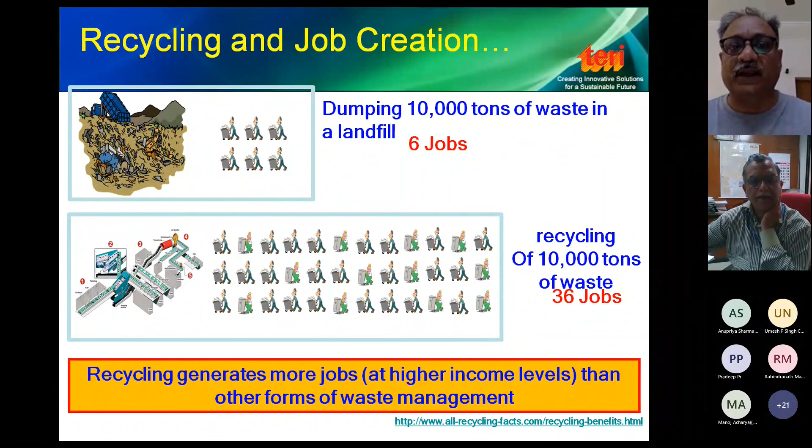Recycling is an important aspect. Studies have shown that dumping the same amount of waste creates 6 jobs, while recycling the same amount, if recyclable, creates 36 jobs. Recycling also creates additional jobs at higher income levels compared with dumping. So it's established that recycling creates quality jobs, and they're all green job creation, which we all talk about.

Just to give you some trends in Europe, for most countries, looking at packaging waste, this is data for 2020. Packaging waste recovery and recycling has been reported at 64%. There's a slight dip in recent years, and that's understandable because of COVID, pandemic, lockdown, and sudden increase in use of single-use plastic material, which increases plastic waste. Packaging waste is mostly plastic. Municipal solid waste recovery and recycling has been reported at 49%, and overall recycling on average is around 46%.

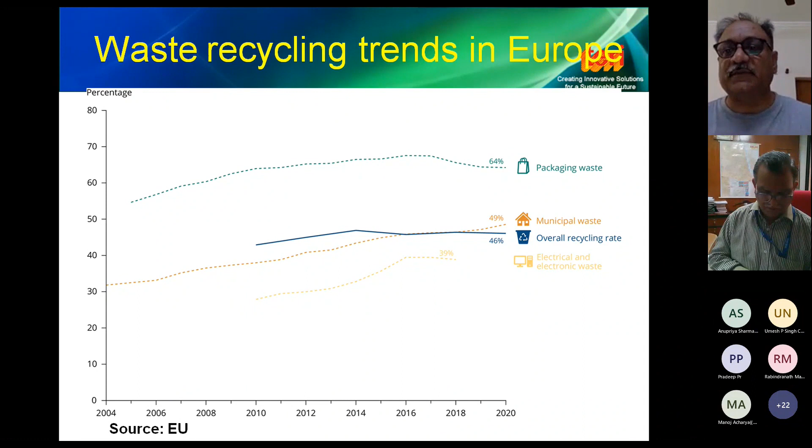So that's the kind of scenario, the kind of benchmark which we look at when we look at recycling and the level countries have to reach. If not 100%, that's sometimes not practically possible. But what are the levels which are desirable?

When you look at world's recycling industry and market, how recycling affects not only jobs but also the kind of economy and economic resources it generates, globally around 1.6 million people worldwide are active in the recycling industry. So recycling is really a global phenomenon, and together they handle around 600 million tons of recyclable waste every year.

And annual turnover in the recycling business - I'll also give you some of the major recycling companies globally - the annual turnover is around 200 billion, similar to the GDP of countries you can relate with, like Portugal, Colombia, Malaysia.

Important to note here is that whatever profit these companies make, roughly 10% of that is plowed back into developing new technologies, developing new environmental standards, and funding research and development, which further creates high-skilled jobs.

Globally, the percentage of secondary material recovered through recycling meets around 40% of the global raw material requirement. So globally, 60% comes from primary material supply, majorly from mining, and 40% comes from secondary material supply. That's an important contribution which recycling industries are making.

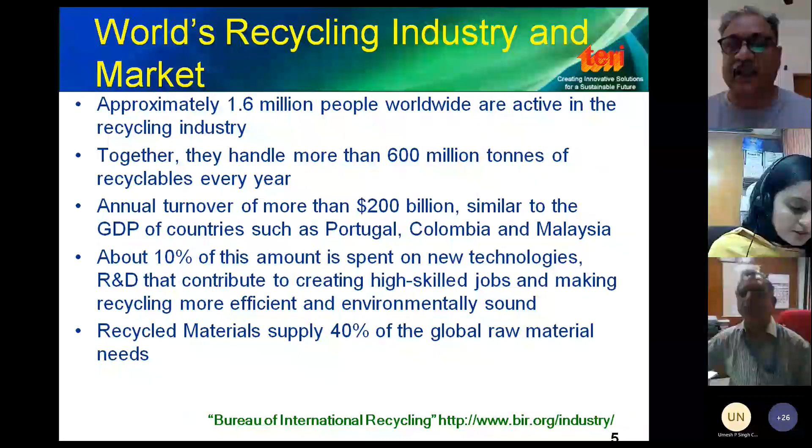So what I'll do from there - this was just to give you a flavor of why recycling is important and why one should look at recycling as an opportunity, and what's the global discourse on recycling currently. It's already established when you look at recycling, except for plastic packaging material in some cases.

It's already established that recycling of, say, metals - largely aluminium and copper - and recycling of glass, though it is more energy intensive because primary production of glass itself is more energy intensive, save around 90% of the energy compared to mining virgin resources and producing a product. Plastic is slightly lower, saving around 65% energy. It's established that recycling is not only less energy intensive than producing virgin material, but since it's less energy intensive, it also helps in meeting climate goals, because that much energy saved means that much greenhouse gas emissions are reduced.

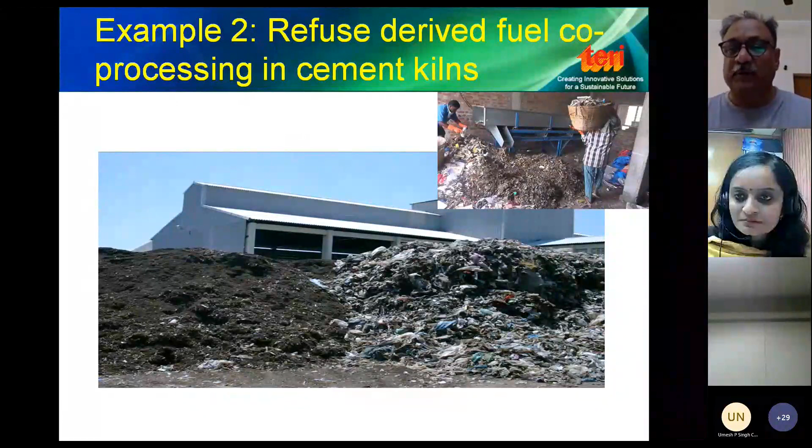The advantage of producing such fuel briquettes is they can be easily handled, stored, bagged, and transported. Compared with the original condition they were in, now they have consistent calorific value.

So they can be easily used for industrial purposes, but in India there's a lot of action now happening on using such fuel briquettes in cement plants. Cement plants are looking for alternate fuel material they can use in the kilns, and in the process they can save coal while producing cement. The advantage of using that in cement plants: cement kilns have high flame temperature inside, which ensures complete destruction happens.

There's good residence time, more than 5 seconds, which is higher than conventional incinerators - incinerators are between 2 to 3 seconds, and it's more than 5 seconds in cement plants. That also ensures no dioxins and furans are generated, which is a major concern when you burn waste in waste treatment plants.

Also, since cement kilns use lime and have an alkaline atmosphere in the kiln, any acid gases generated are neutralized by that alkaline environment. The biggest advantage is that the waste-derived fuel you use is consumed in the cement manufacturing process, and there's no ash or residue coming out - it becomes part of the cement matrix.

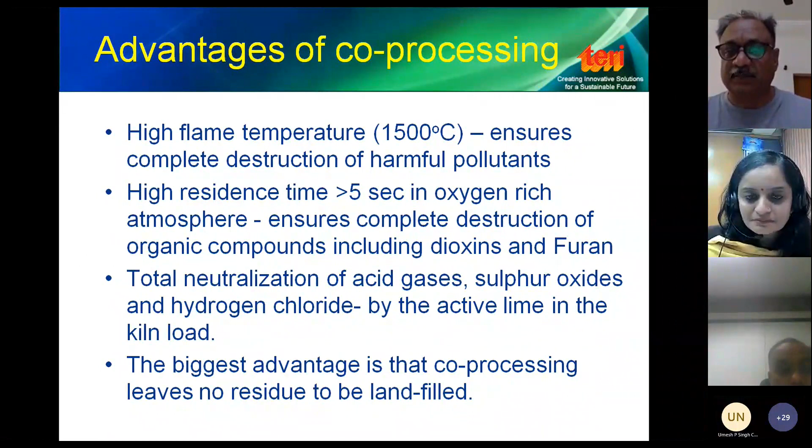Plastics in road construction is something which has really caught up, and a lot of construction has happened now. NHAI has also used millions of tons of plastic, but initially it started with a few experiments - for example, in Jamshedpur township, run by JUSCO, and a few roads in southern India where it started.

Plastics which are too dirty or cannot be recycled - one clear example is multi-layered plastic, which is not recyclable. So they can be shredded again and mixed with bitumen, and such roads are laid using such plastics.

Results have shown that these roads last much longer. In this experiment, for example, when we visited, they said this road was good for at least 5 years, used without any wear and tear. So there was a clear example of how this can be used very safely in road construction.

When I said multi-layered plastic, one particular example is Tetra Pak, which we all are aware of. Let's look at how Tetra Pak is used in packaging.

If you look at the different layers in Tetra Pak, it largely comprises paper, around 75%. 20% of the Tetra Pak carton is polythene, and 5% is aluminium. This is how they are arranged in a typical Tetra Pak carton.

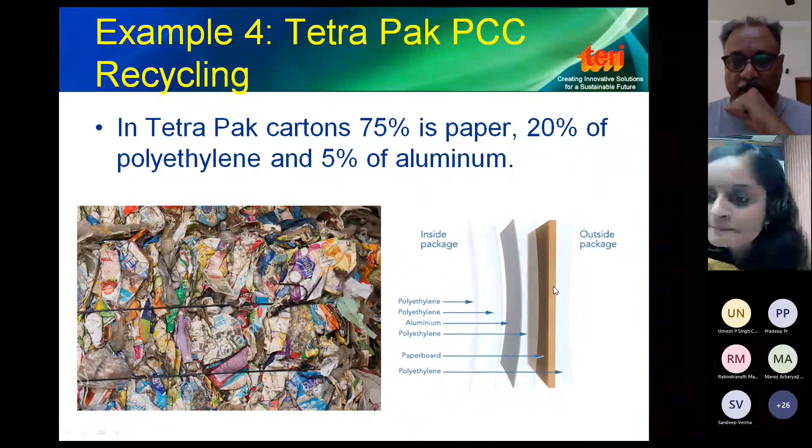One of the applications they have been looking at is making corrugated sheets. It is heat compressed and made into such corrugated sheets.

You can see the shiny portion is actually aluminium, and largely it is polythene with some binders - a minimum amount of binder is required to bind them and give them shape into roofing sheet material. The advantage here is, unlike concrete roofing sheets, these are much lighter, much stronger, and you can drill holes in them and use them in construction applications.

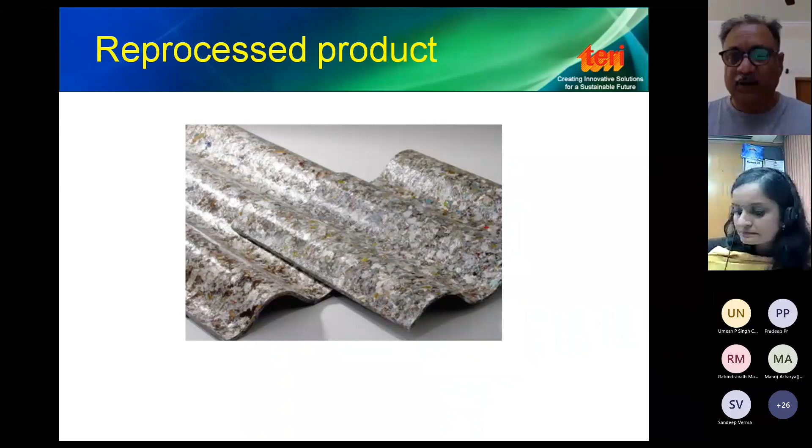There's no effect of moisture or humidity, and they don't get degraded. But marketing of such products is required, and one needs to see how such recycled product can be marketed. So with this, a small description on how our own recycling in the informal sector is happening.

This is one example from Dharavi. You all know it's one of the largest slum settlements in Mumbai, in Asia, and they have been looking at recycling - they recycle a large part of Mumbai's waste that is generated. 80% of Mumbai's waste is recycled in Dharavi.

These figures give you some statistics on how much revenue they generate annually, around $1 billion each year, employing around 1 million people in the business. It's a vibrant recycling operation in Dharavi. So even at the informal setup, the value of recycling has been established and recognized, and they do a lot of recycling in such a manner.

The message is that the ultimate aim of all this, as the Honorable Prime Minister also said a few months back, is that the ultimate goal should be to create garbage-free cities or landfill-free cities. Because those who are from Delhi would know how in winter and summer times these landfills start burning, producing smoke and contributing to pollution, and also become a nuisance in the city landscape. That's why there's a requirement for creating such landfill-free cities.

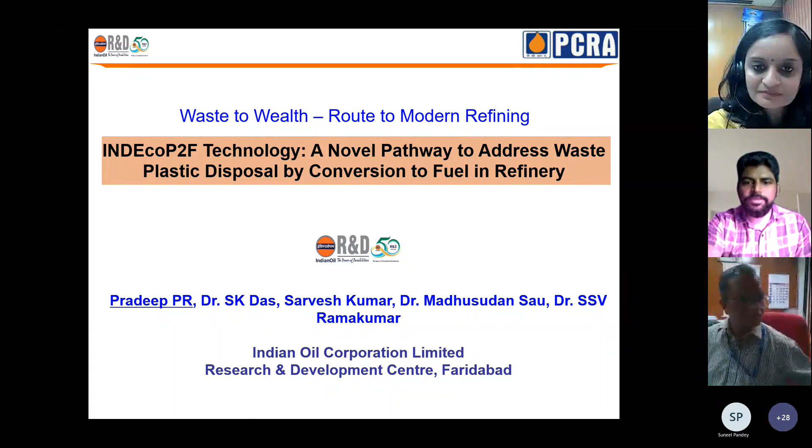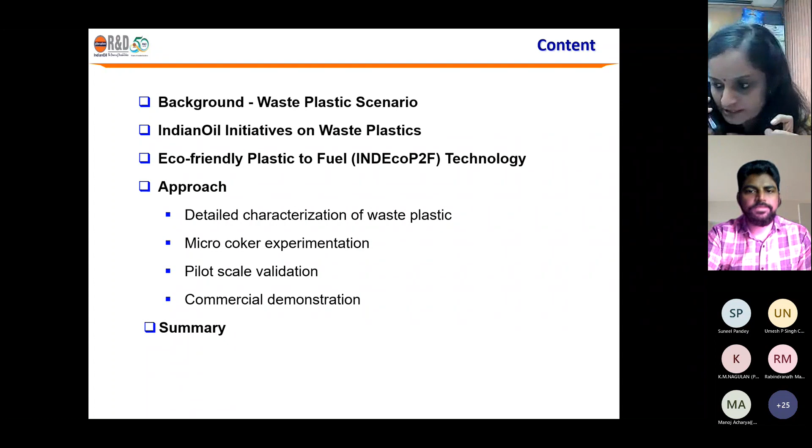This is a brief background on this presentation. I will briefly discuss the waste plastic scenario and the initiatives that Indian Oil has taken for waste plastics and ensuring plastic neutrality. Then I'll move on to the INDEcoP2F technology features and other benefits, the approach we adopted in our laboratory as well as pilot scale, moving on to commercial demonstration, and I'll make a summary of that.

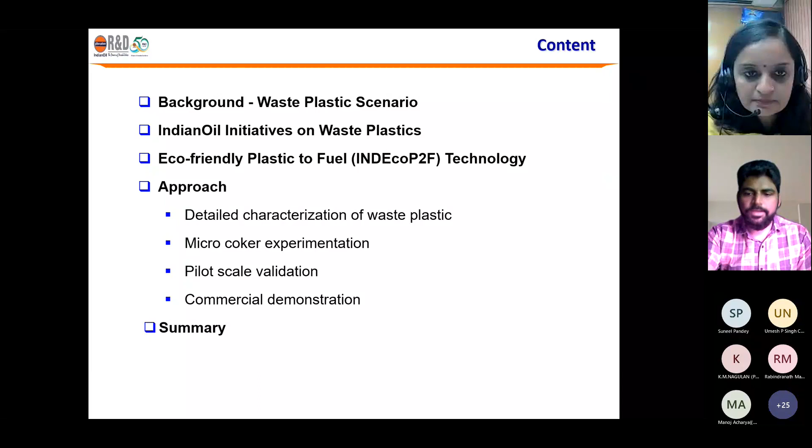If you see the global scenario, there is a considerable amount of plastic consumption, more than 300 mmTPA, which generates more than 140-150 mmTPA of plastic waste. A lot of plastic waste is getting ended up in landfills, and some part is getting re-incinerated. Even in the US, due to high plastic consumption, this problem is a very big menace even in advanced developed countries.

In India, the scenario is also going in similar lines as our GDP is increasing, as the income of the average Indian is increasing, the consumption of plastic is also increasing. As of now, around 9.5 mmTPA of plastic waste is generated. Out of that, India is one country where recycling is at a higher level compared to other developing countries.

Because recycling or reuse is in our culture - you might be knowing, our ancestors, even our grandparents would have told you, okay, don't have much materialistic things from outside and live a contented life. So this kind of philosophy is there in our Indian culture. So we don't generate much burden to our Mother Earth.

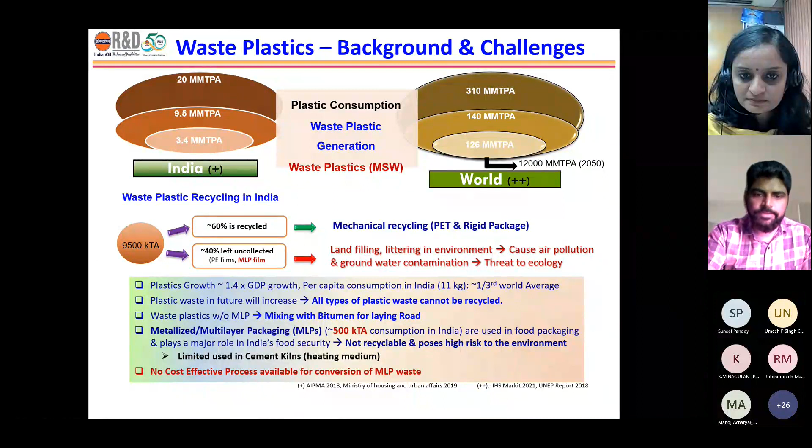Out of the plastic waste, the majority is packaging waste, and in that, multi-layer metal additive packaging contributes to a higher degree. There is no much cost-effective process available for conversion of this kind of waste.

When you go for incineration of waste, there are a lot of additives added in plastics to improve certain properties. Suppose you need fire resistance, you add some bromine-based compounds. Different compounds enhance the properties of plastic. While this gives a benefit in terms of usage, at the end of life these actually create the biggest hurdles in recycling.

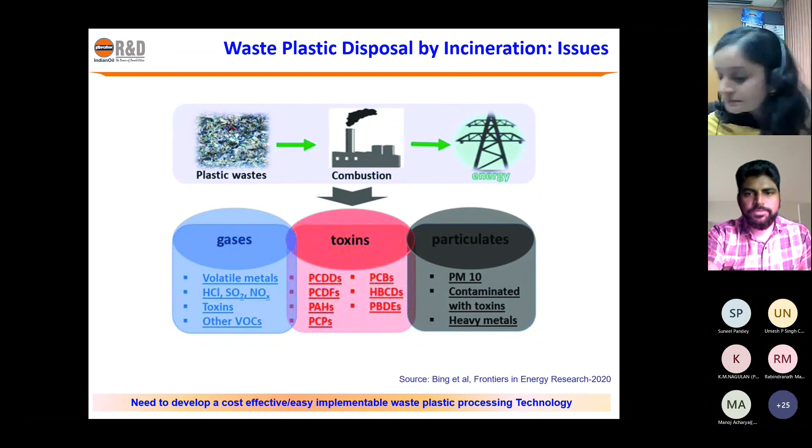If you go for incineration, you can see a lot of toxins, particulates, and harmful gases that would be emitted. So there is a need for a benign process to handle plastic waste.

In this aspect, Indian Oil has adopted several approaches. As Madam also told about a recent approach, the PET bottle recycling into clothes. Similarly, on the R&D side, we have done chemical recycling initiatives - how to produce specialty wax, how to convert polystyrene waste to styrene monomer, and different types of packaging being produced from waste plastics.

There's also the roads aspect - several companies have done this, and we have some initiatives in this area too. And even on the biodegradable plastic side, research is going on, so maybe we'll come out with some products in the near future.

Our focus mainly was on the chemical recycling part and how, using the existing infrastructure in our refinery industry, we can handle this waste, because setting up an entirely new plant is a costly proposition. The low hanging fruit for the refining industry is to look at what available infrastructure or assets can be used to do this chemical recycling.

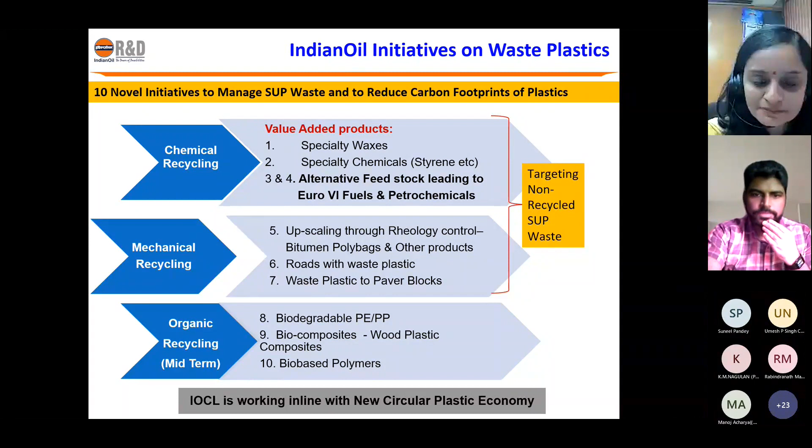In this journey, we came out with this idea of the technology, INDEcoP2F. What we looked at in our team is that we were working on residue upgradation, and we were looking at ways in which we can add value to that particular process.

What we identified is that if you consider a delayed coker unit in a petroleum refinery that operates at a typical operating temperature of around 500 and an operating pressure ranging from 1 to 3, these conditions are ideal for cracking of plastics.

There are several literature data, several studies - you might have heard, even from my childhood, several news articles coming that someone made fuel from plastic. What we found is that there is a certain activation energy requirement for breakage of plastic, which is nothing but a polymer of different constituents. So if you depolymerize the plastic, whatever liquid comes out can be categorized into different parts of fuel.

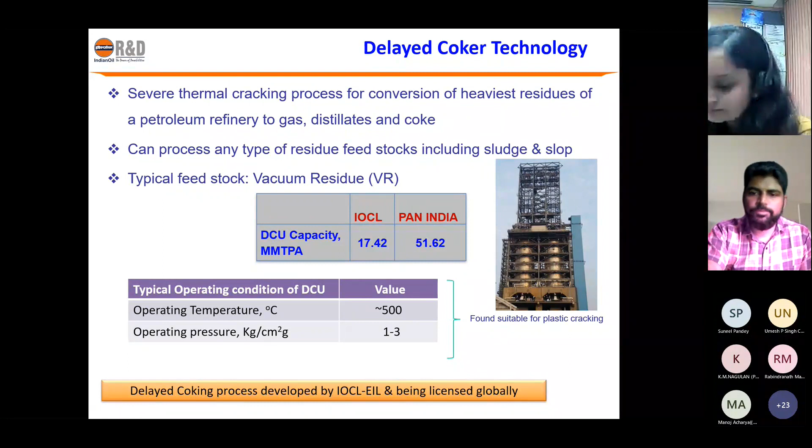Our delayed coker is one of the units we identified which could be used for plastic processing. We then came out with a process for how to do that, because the idea maybe many people had, but how to do it in a commercial plant - that was a big challenge.

As you know, in the refining industry we have a lot of sensitivity in our feedstock - if there is a 1% difference in aromatics, your overall plant yields will go haywire. There are also a lot of impurities in plastics. How to handle those impurities, how to do the processing without causing harm to the hardware, without causing choking problems, and without impacting product quality - that is of paramount importance, because ultimately we have to make fuels as per the specifications of BS. So there are a lot of challenges.

Step by step, we studied each of these areas and addressed these challenges through our technology. We have come out with this patented technology where we are able to handle all types of plastics, including metal additized plastics to a certain extent.

What we achieved in this technology is that we could convert 95% or more of the waste plastic to mainly lighter distillates like naphtha and middle distillates. Naphtha is a very demanded product in the scenario of crude to chemicals - wherever you have higher naphtha, you have higher petrochemical intensity. Even some middle distillates are now being thought of to valorize into aromatics. So this is a perfect fit for the future scenario of crude to chemicals as well as net zero, along with ensuring plastic neutrality.

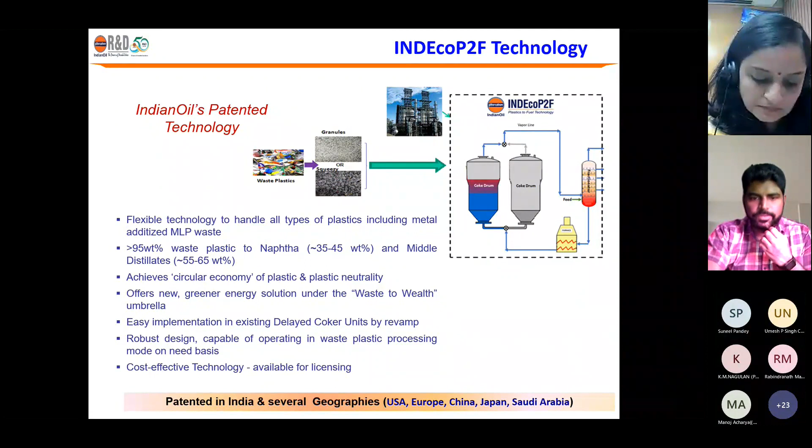The design was made robust and capable of processing waste plastic on a need basis. There are graphs showing so many MMTP of plastic available, but if you float a tender for 100 tons of plastic, very few parties can supply that requisite quantity at your doorstep. So whatever technology you implement should tolerate feed starvation—one month excess supply, next month less supply, and another month the plastic waste quality changes. So this technology should be highly flexible, and that we have achieved in this overall process.

These are the novel features. Mainly we are focusing on PE and PP. As Dr. Pandey told, PET is a highly recycled plastic—more than 91% of PET is recycled in India, so hardly you get any PET in the plastic waste as of now. So only a marginal amount of PET we can handle. What we focused on is India-specific, using our existing infrastructure without much modification. Even though there is some hardware requirement in the technology, it is simpler and lower cost hardware, and you can easily implement it in the existing running DCU.

We have an advantage that the reactor goes offline in every other cycle, so we have ample time to implement the technology without hampering regular operation. Another important thing for oil and gas is that you cannot reduce your feed throughput. If I say you process this plastic but reduce the throughput by 5%, it's not agreeable to management, because you need to maintain the crude throughput in the refinery. So this technology gives you a way wherein you need not reduce your unit throughput.

It overcomes, in particular, coker furnace issues. The furnace is a critical hardware item, but we are not having any issue in the furnace due to plastic processing—that's another major advantage. The amount of plastic to be processed can be varied, and decided on a case-to-case basis based on the availability and quality of plastic. Suppose you design the unit for processing 2% plastic—it has the flexibility to go down to 0.2% plastic also, which is the requirement in a realistic situation. So this is like an on-purpose technology.

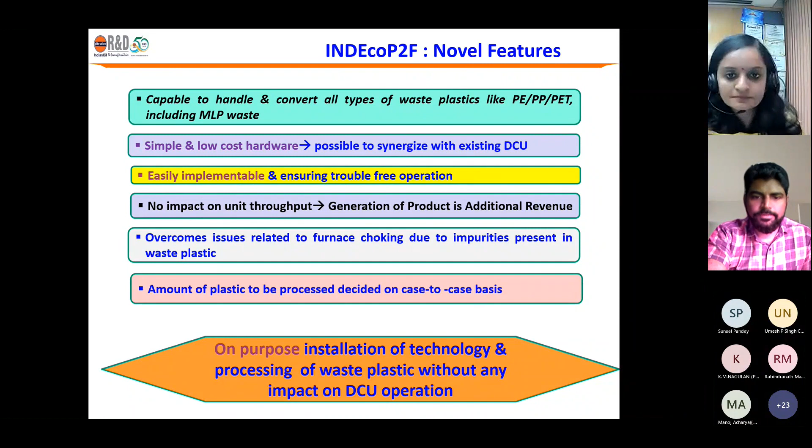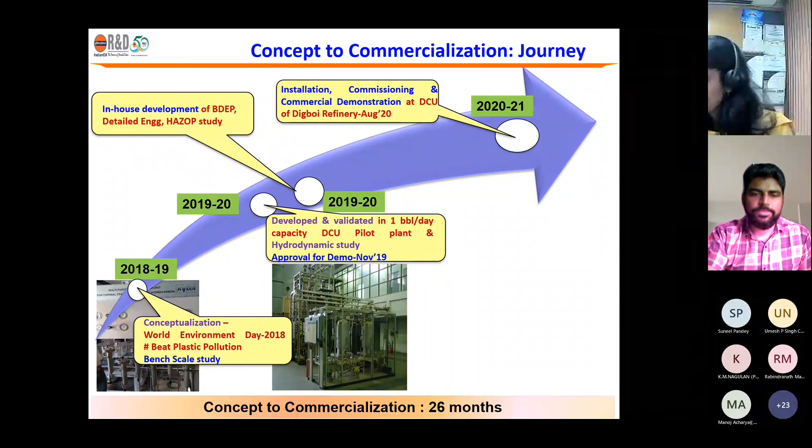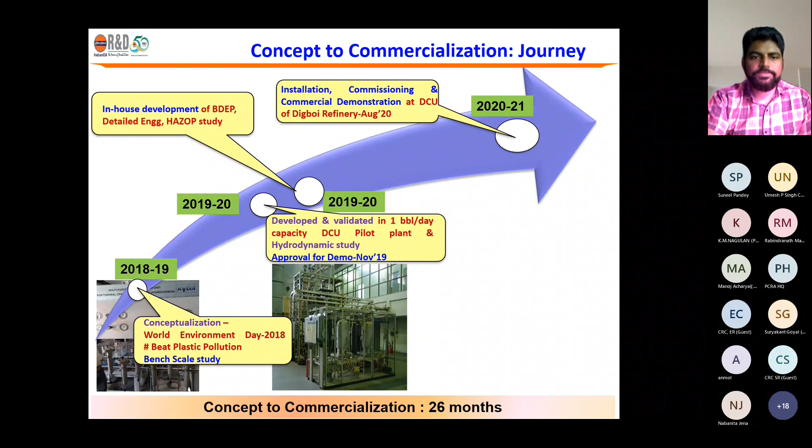If you see the concept to commercialization, we got the idea back in 2018, and made the first presentation coincidentally on World Environment Day, when some initiatives were also coming for plastic neutrality. After that, this project got momentum and we went into micro scale, then pilot scale. We have an in-house engineering team for demonstration of technologies and licensing, so we did the in-house development of BDEP, detailed engineering, and all the studies. Then we installed and commissioned this hardware in one of the refineries in Northeast India Oil, and did the commercial demonstration.

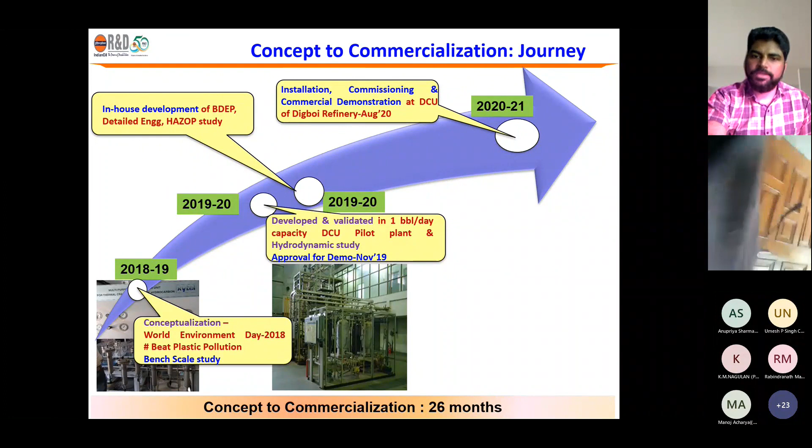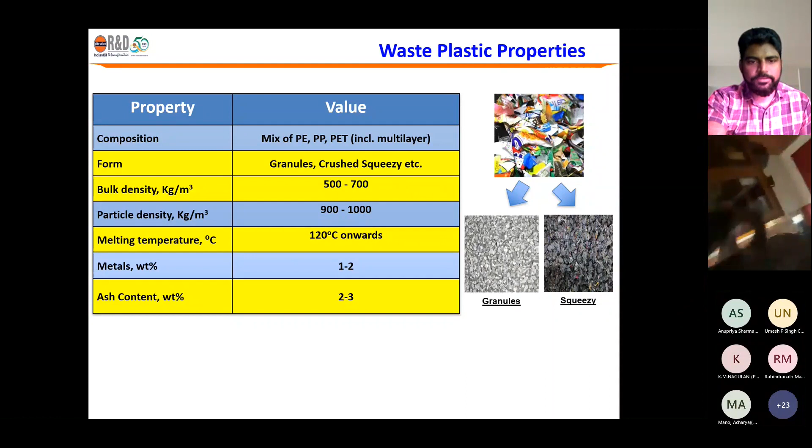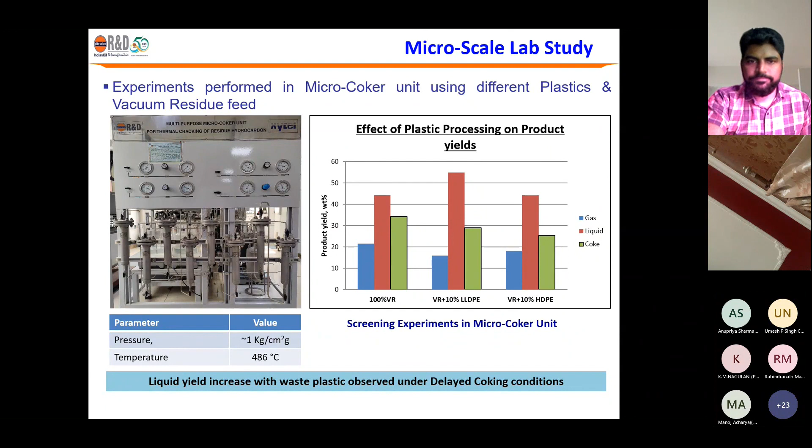After that, we have a 1 barrel per day delayed coker pilot plant in our center, which was used for carrying out the validation. We did around 2.2 weight percentage of plastic dosing along with a high CCR vacuum residue, and we confirmed that whatever we predicted from our micro scale studies was validated, along with all the product properties.

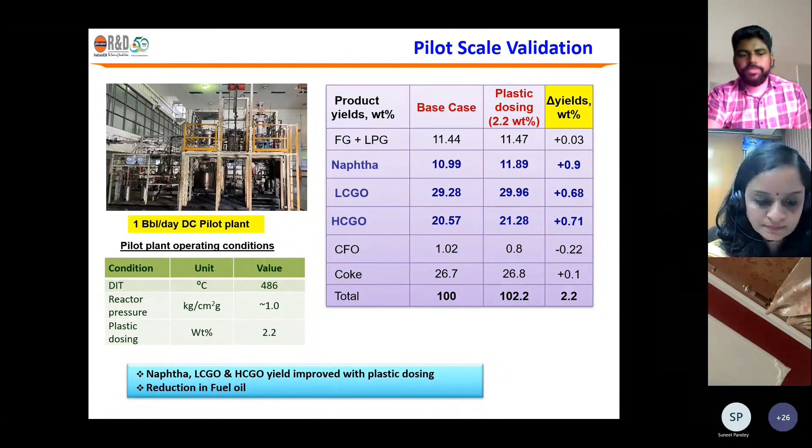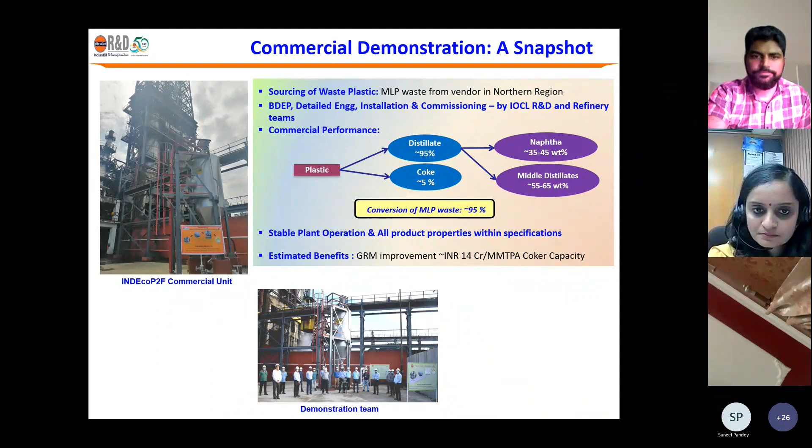So this technology has a lot of benefits - it's cost-effective. Off the top of my mind, for around a 3 million ton coker, it would be maybe less than 15 crore capex, just a ballpark cost. It's easy to implement in existing units by revamp, without any shutdown requirement.

And it's a viable part of extended producer responsibility, because the responsibility of handling waste is being shifted to the producer itself. In the future we may have to bear some of that responsibility - even though we're not making the packaging, we are the generator of the polymer monomers. So later we can expect the government to come out with some kind of regulation, and this technology fits into that future scenario.

And it achieves a circular economy of plastic, because the plastic journey starts from crude oil in the refinery, and so it comes back into the refinery itself. It's like a circular economy that we are actually realizing.

As the previous speaker mentioned, plastic recycling is currently being done by the bottommost strata of our society. Why would someone invest in technologies to recycle? Only when there is demand for whatever he's producing after recycling will people come out with investment. So we, as an oil and gas major, have some responsibility to start this wheel moving - to create demand for this kind of recycled material using technology, then people will come out with more recycling options. That's going to create a lot of jobs, even in logistics, supply, processing, and a better quality of life for the labor force involved.

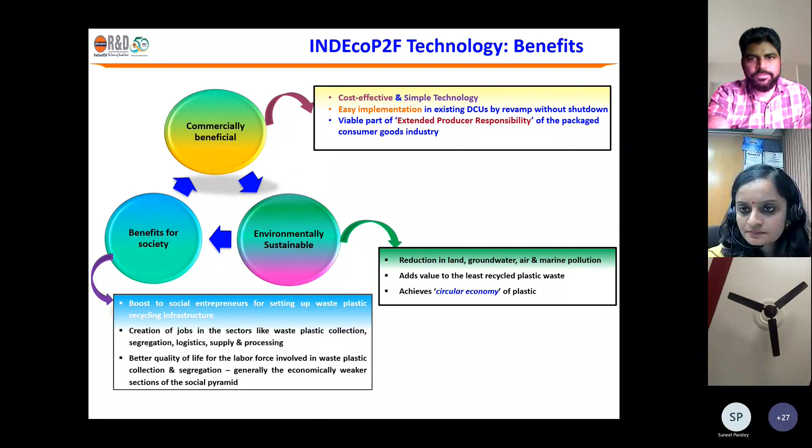Summarizing, the INDEcoP2F is a need-of-the-hour, cost-effective, environmentally benign technology for conversion of plastic waste into fuel. We have demonstrated it at commercial scale, and it was first of its kind in the world, and we presented it at the World Petroleum Congress last year.

This is a green solution under the waste to wealth umbrella, and it's in line with several government initiatives like Make in India, Atmanirbhar Bharat, and the Swachh Bharat mission. As an oil industry, we can make a real difference in plastic waste recycling by implementing this technology. And as mentioned earlier, we have a dedicated team for technology licensing.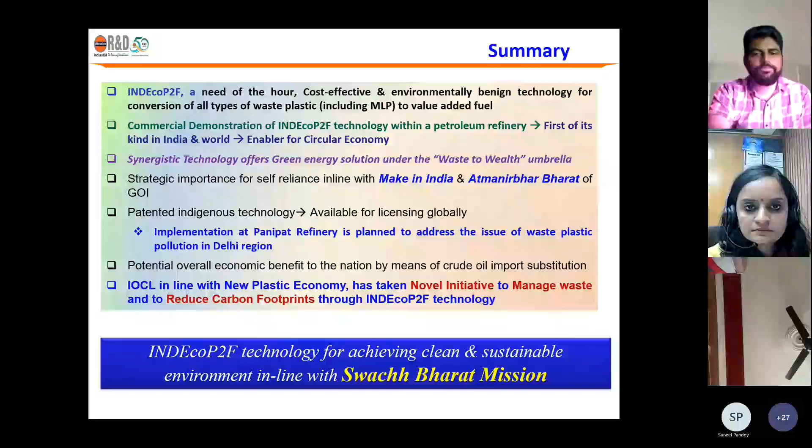So this would be a technology which will help the nation by addressing part of the plastic waste pollution issue, as well as trying to reduce some part of crude oil imports, because we are generating fuel from a recycled source. Thank you all, Jai Hind.

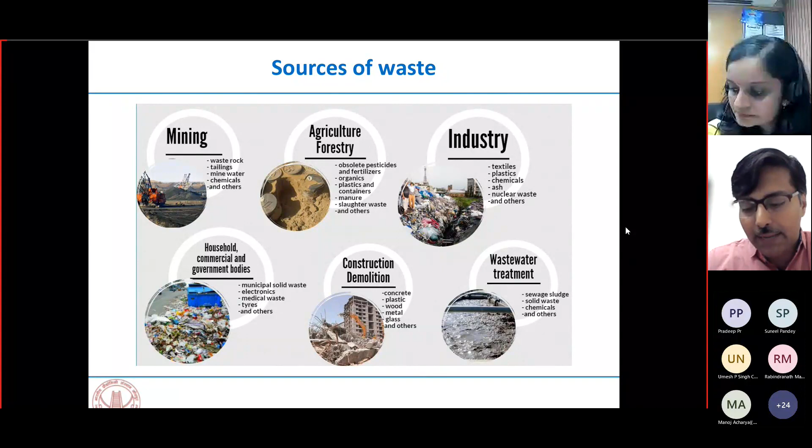And if you look here, what are the sources of this waste? We, as a human civilization, are engaged in many activities for the advancement of our civilization, like mining, agricultural, industry, construction, and along with that we have household waste coming from households, as well as waste water coming from industries and households. So all these are sources of waste that is being discarded, most of it currently being discarded to be absorbed by the environment around us.

And if we want to categorize these types of waste, the major types, for example, municipal waste is becoming a big challenge, shortly called MSW. This is waste comprising a wide variety of different types of materials like organic, inorganic, all those sorts of materials. This is becoming a growing challenge and problem, which we may be realizing to some extent and maybe not realizing also, but in coming years it will be a big problem.

For example, if you look into the scale of municipal waste disposition, the oldest dump site happens to be in Mumbai, set up in 1927. The size of this dump site is almost around 247 football fields, so that is the massive amount of area being occupied to treat this municipal waste.

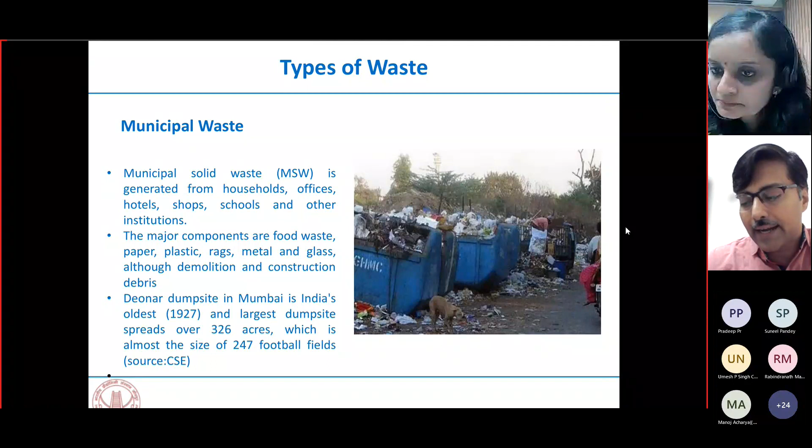As our cities keep on growing and the population is growing, the cities are having more density in terms of the number of people, the municipal solid waste generated is becoming a big challenge. What to do with that, and is it really waste, or can we get something out of it?

For example, in India now we are a middle income country, so we are generating far less waste compared to high income countries, which have much less population compared to our country. But because of the high capital intensive lifestyle, the consumption intensive lifestyle, the generation of waste is quite high. The problem is that their population is less as compared to the space available.

The other point is, with industrial growth, because we want our industries to grow, we are getting into a lot of diverse fields, from electronics to solar panels and everything. These industries are also generating a lot of waste, quite difficult to handle, treat and dispose. This industrial solid waste will keep on growing as our industries grow, and we have to find means or methods to handle this waste, which in certain cases has quite a high amount of toxicity.

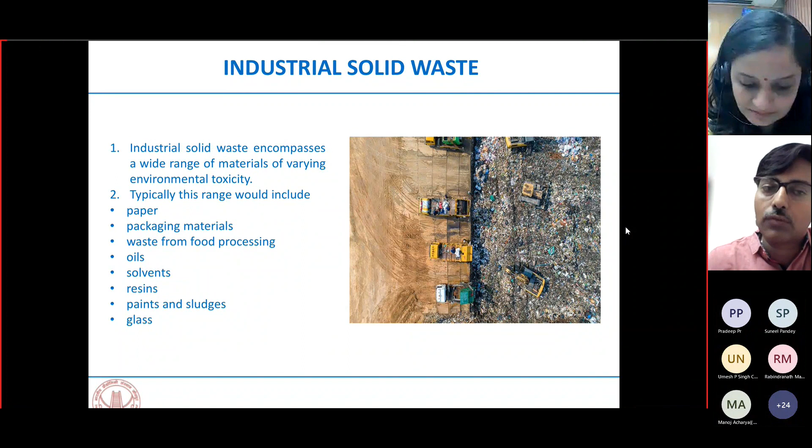Then comes agricultural waste, which is the least harmful of all we have talked about, predominantly coming from our agricultural operations. The part of the agricultural produce which is discarded, and the part which actually goes bad because of the lack of preservation and lack of proper transport. So a bulk of agricultural waste is generated just because the produce does not reach from the field to the target consumer. All this contributes to agricultural waste, which is quite high.

When we say waste, again the question comes: is this really waste, or is there some wealth in it? Now, as we have already been hearing about recycling, why do we need to recycle? The simplest thing is, if we have a linear economy, that's only possible if we have infinite resources, and the earth has an infinite capacity to regenerate or produce those resources.

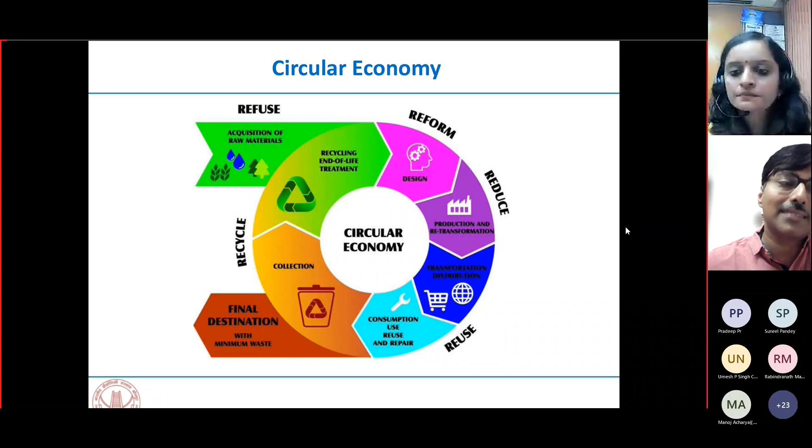Now what to do with that?

One basic thing which I want to highlight, and which probably every one of us can make a contribution to, is waste segregation. This is very, very important. In India, we still do not have a proper mechanism of waste segregation. And even if waste segregation is there, people may not be fully aware of its importance.

Waste segregation is the biggest, the first step we can all take to convert waste into wealth. It means separating different kinds of waste into different categories so they can be treated according to their nature. This is very important for any kind of waste conversion to wealth. It's the first step, and also the most challenging one.

This step can cause any technology to fail. Whatever technology you develop, you need a technology that can handle all sorts of waste. So waste segregation is very important for the technology to run perfectly.

The framework for waste management should consist mostly of recycling as much as possible. Of course, there will be certain materials which cannot be recycled or are hazardous, and certain materials which are biodegradable and can be easily recycled.

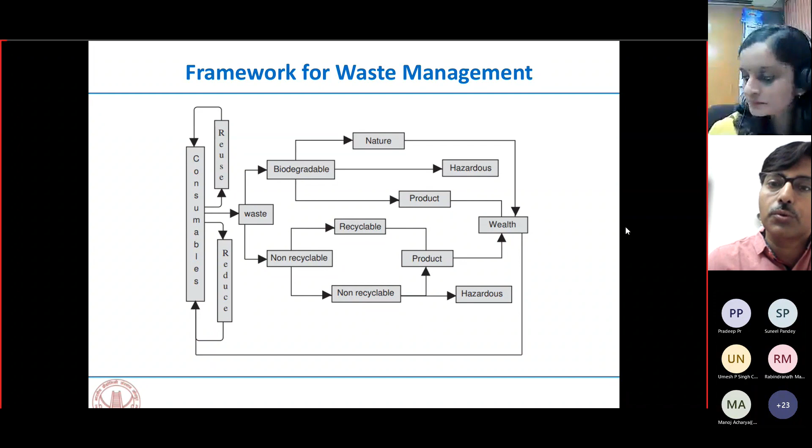What we need to do, as is inbuilt in our society, is first reduce consumption as much as possible, reuse whatever is possible to reuse, and whatever is left as waste, try to convert into wealth. That is how the cascade goes.

This is an inverted pyramid, where the most favorable option is prevention. Same thing if we talk about a disease: the first option is to prevent the disease, and only the last option should be treatment.

The first option is to prevent waste generation, and whatever is possible, reuse, recycle and recover. Finally, whatever you cannot reuse, recycle or recover, you need to dispose of. But while disposing, something can still be done to recover value at the last mile, though that is optional. Of course, we should try to recover as much as possible before finally discarding it.

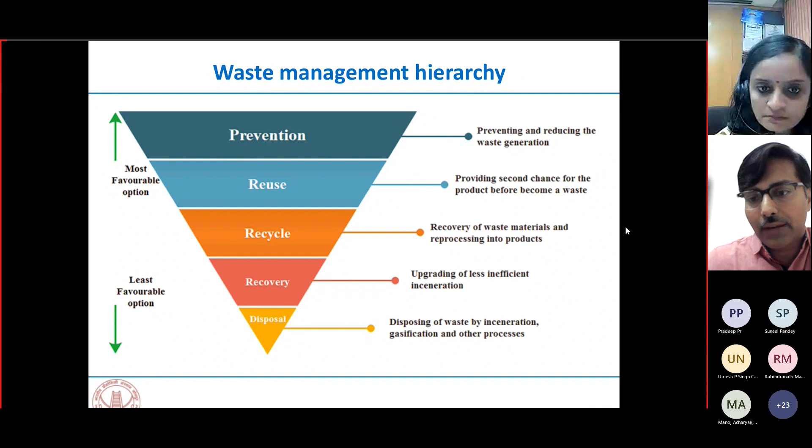We all know what wealth means - something which has an economic value, a monetary value. So if we want to see waste-to-wealth from that perspective, let's talk about some numbers.

In India, if we just talk about urban areas where data collection is more robust, we are generating huge amounts of municipal solid waste every day. Out of this, a significant percentage is organic waste.

This organic waste, if dumped without any treatment, decays and gives off methane, which has a tremendous global warming potential, along with carbon dioxide. If you can treat this biodegradable waste, you can produce something called bio-CNG, which I will discuss in the next slide.

This bio-CNG has a tremendous market value because it is a fuel. You're already aware of compressed natural gas, used in transport and industries for energy generation - you burn the bio-CNG gas. So this biodegradable waste, if treated with appropriate technology, can generate bio-CNG, which has a commercial value, estimated at a yearly revenue of 55,000 crores.

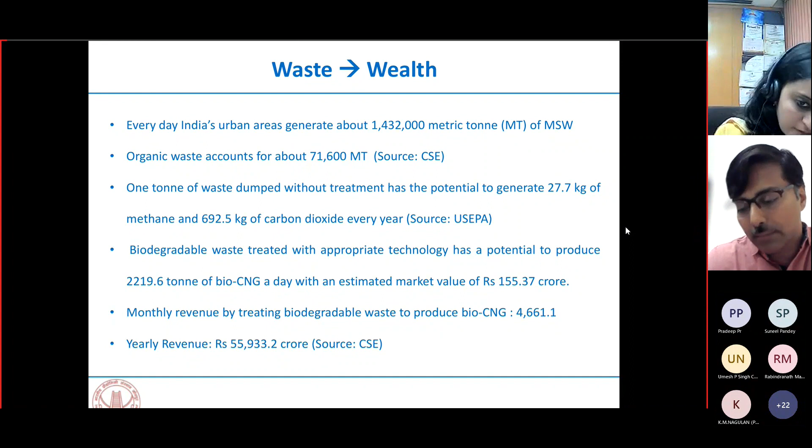We have heard about biofuels, where you basically use biological carbon fixation in the presence of sunlight, unlike fossil fuels which are formed over time and are not renewable - they are non-renewable, finite resources.

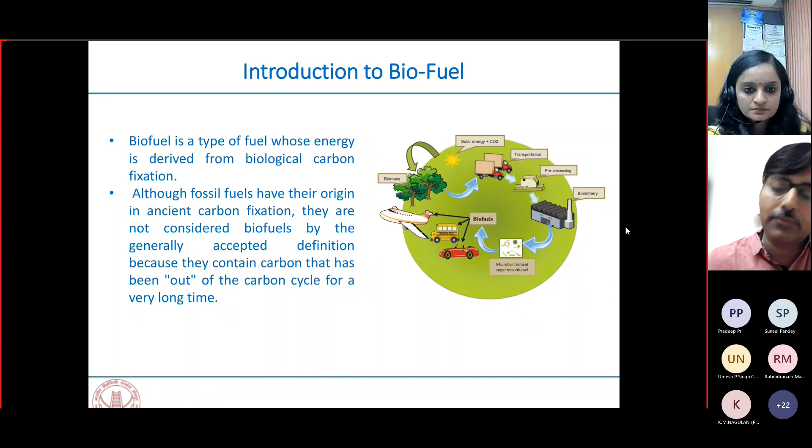But biofuels are a kind of renewable source of energy, and they can be replenished in a short period of time.

One of these biofuels is biogas, which you are already aware of. You have heard it started a long time back but has not caught up in a big way. But this biogas is very simple to produce, and it's a very well-known technology. People can see biogas plants existing. Of course, there are certain challenges in the operation and maintenance of those plants, but they are running well over the period of time.

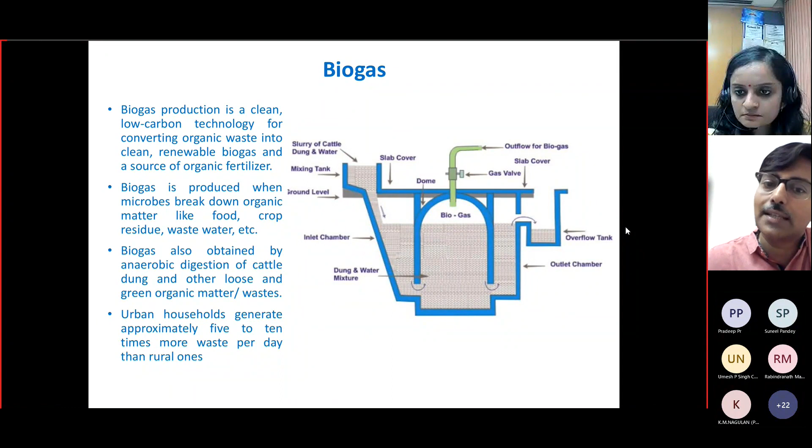Basically, what you are doing is anaerobic digestion of the organic matter, and you are producing gas which has a calorific value and behaves as a fuel. Of course, this gas contains methane and CO2. The methane, or natural gas, is the one which burns and has the calorific value. But because you have a significant percentage of CO2, almost up to 40%, it reduces the calorific value of the total gas mixture, and it cannot be readily used for the applications for which we use natural gas.

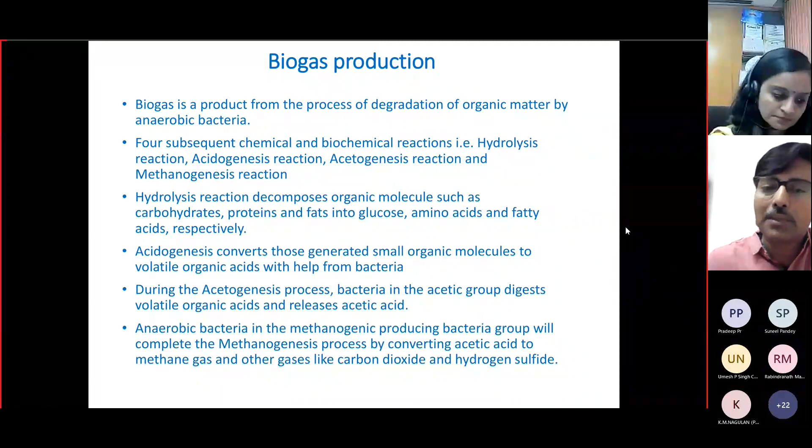I am skipping the process and the details of biogas production because this is too much technical detail. But as I said, the end process is the anaerobic digestion of organic matter to produce methane and carbon dioxide as the main constituents.

Now the point is that we can produce the same kind of gas from municipal solid waste. But as I've already mentioned, the major problem is that the municipal solid waste has to be segregated into organic and inorganic, because the methane or biogas that is produced comes from the organic part of the waste. So we should be focusing on source segregation, because once the waste is collected and mixed, it is very difficult to segregate. So segregation at source should be very much implemented, because that's what will help us convert this organic part of the solid waste into wealth, that is biogas.

Other challenges are there too. Of course, the composition of waste keeps on changing. Throughout the year we have different seasons and different agricultural produces, and depending on humidity and other things, a lot keeps changing. But that can still be handled with proper conditioning of the equipment in terms of temperature and composition of the bacteria.

But many such procedures have failed too. For example, in Bangalore city, because of improper waste segregation, the plants have failed to operate.

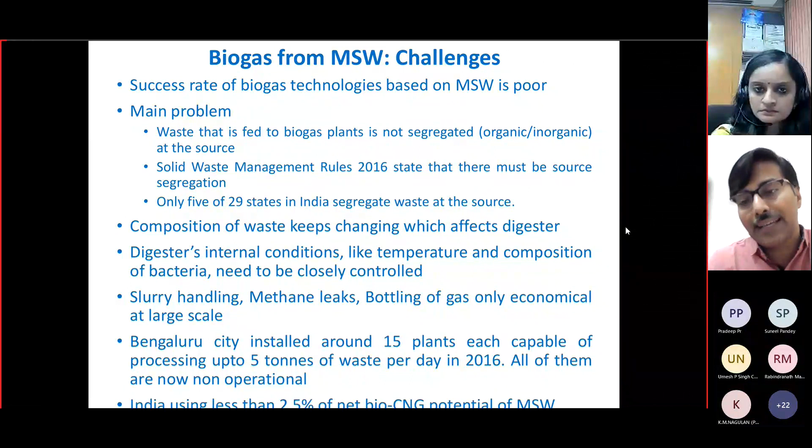So the net bio-CNG potential that can be obtained from municipal solid waste—we are currently utilizing a very small percentage of that. It's only 2.5% of the wealth that is available or that can be extracted from municipal solid waste. Now talking about bio-CNG, this is actually compressed natural gas obtained by purifying the biogas. There is a lot of focus currently on this. Government is pursuing aggressively several schemes and entrepreneurships, and all the major oil companies are into doing this bio-CNG.

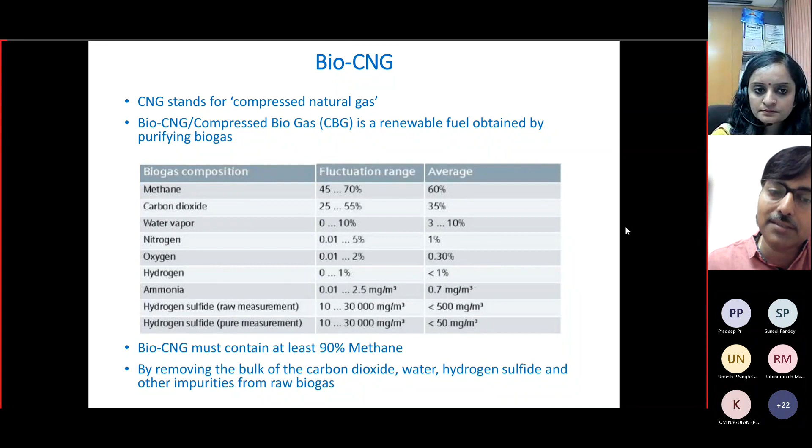So regarding bio-CNG composition, the biogas has a wide range of methane fluctuation, and on average you can say 60%, and this is the fuel that produces energy. We also have a significant amount of carbon dioxide which has to be removed from the biogas to make it useful. There are also other components like sulfur, which are undesirable impurities in the raw gas. Now, as per Indian standards, bio-CNG should have at least 90% methane, and the rest 10% can be CO2, nitrogen, oxygen and other things, with a very minimum percentage of sulfur. So this is what we have to achieve.

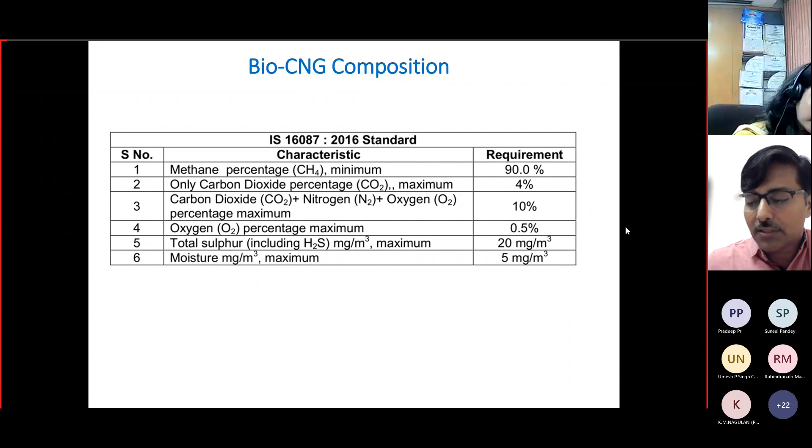So what people are doing now is to purify or enrich the biogas. Enrichment of the biogas involves two things. First is removal of CO2, so that the volumetric concentration of methane becomes high, up to 90%, as we have discussed, so that it can be burned in existing systems—furnaces, natural gas fuel transport systems, electric generators, whatever.

The removal of CO2 involves a lot of different techniques: pressure swing adsorption, water scrubbing, monoethanolamine systems. Each one has different advantages and disadvantages, and all of them are capable of ultimately increasing the methane content in the upgraded gas. This will consume energy, but when we generate energy from the waste, this input cost is offset or absorbed.

The other thing is H2S, which is also quite corrosive, so this has to be removed as well. Again, different methods are there: water scrubbing, activated carbon. These are quite common methods, and each one has different complexity and cost. So these are choices, but the technology is available.

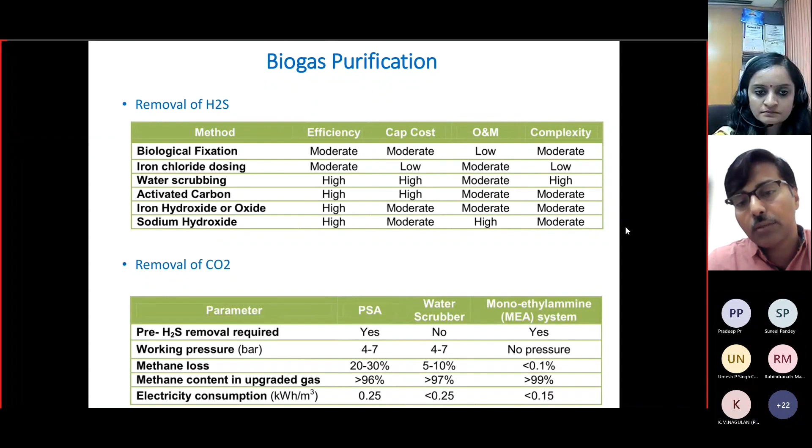Using these technologies, once you have the biogas, it can be enriched or purified into bio-CNG having 90% methane. This is just a layout showing what we can do.

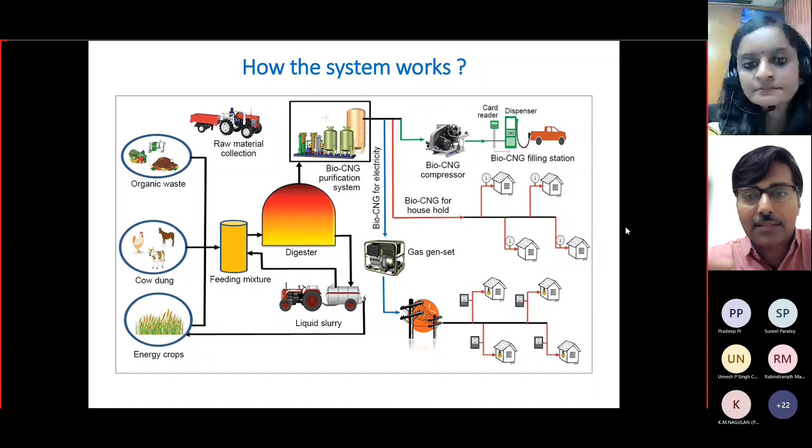We can set up such similar systems, and the beauty of this is that it can be a distributed system also. It need not be centralized, because India, being a very vast country with different geographies, different crops and different waste residues, it's very difficult to plan centralized things, since centralized big systems are difficult to maintain and handle.

So for the bio-CNG initiative, as I mentioned, it has been mandated that municipal solid waste should be treated and used to produce this kind of energy. Central financial assistance is available for entrepreneurs going into bio-CNG concepts, and it has also been mandated for use in motor vehicles instead of compressed natural gas, which is already being used. So these initiatives are helping the uptake of bio-CNG.

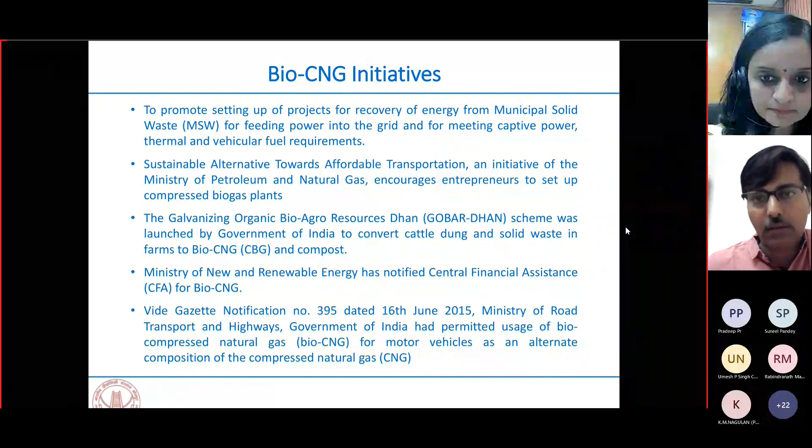Coming to an example, this is already operational. The biggest bio-CNG plant is running in Indore, and as many of you will be aware, Indore has received the award of cleanest city of India quite a number of times consecutively. It has set up this kind of plant in a PPP model.

It collects the garbage from the city, and using that municipal solid waste, it produces 17,000 kg of bio-CNG, which the Indore Municipal Corporation buys back and runs city buses on, or sells in the market.

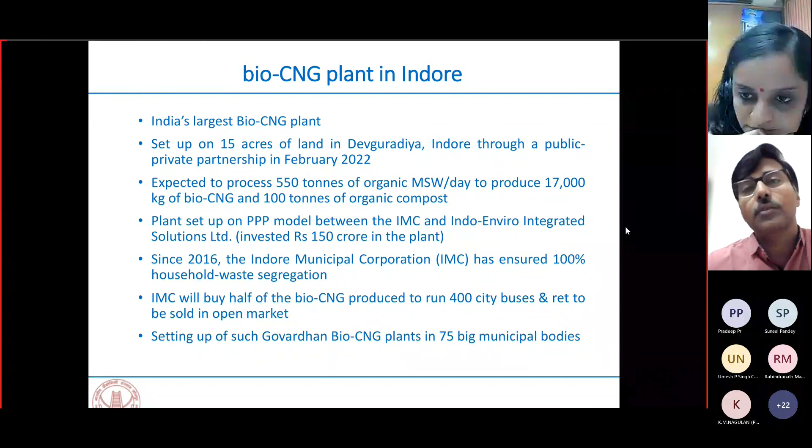But this is only possible because the Indore Municipal Corporation has ensured 100% segregation of waste at the household level. So this is very, very critical for this technology.

To conclude, what we need to do is find new pathways, new technologies for sustainable development so that nothing goes to waste. Actually, there will virtually be no term as waste if the ideal thing happens.

This is only possible if segregation of waste is done, and we have to develop technologies for converting this waste to wealth. For different processes, different routes are there: gasification, biogas production, and lots of things. Lastly, we also need to develop technologies to use these biofuels or low calorific value gases, because production is not enough. You need to do the uptake, you need to sell it, you need to actually do the last mile extraction, and this is where research and development comes in.

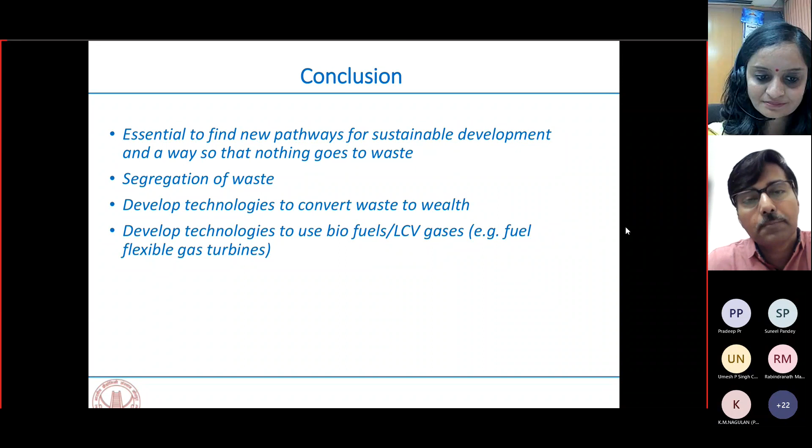For example, at IIT Jodhpur we are working on a biogas driven micro gas turbine funded by PCRA. We are working in this field. With this, I would like to conclude my talk, and thank you for your attention.